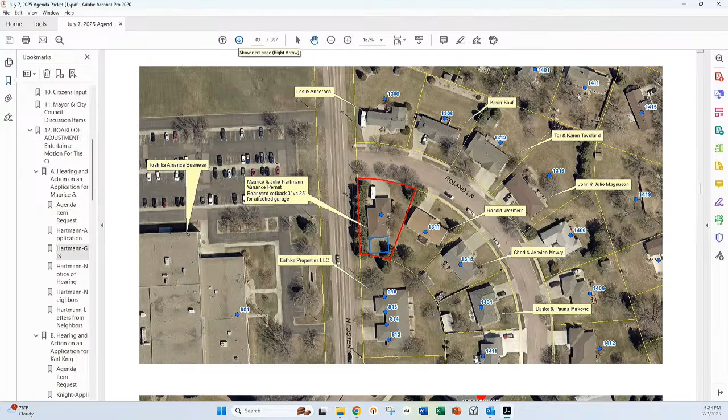Would anyone else in the audience like to discuss this?

All those in favor of the motion say aye. Aye. Opposed, same sign.

Hearing and action on the application for Karl Knight variance permit. Karl Knight has applied for a variance permit for a rear yard setback of 11 feet versus 25 feet for an attached covered patio. This is located at 318 Christine Street, legally described as shown on the agenda.

Mr. Jennings: Mr. Mayor and Council, Planning Commission recommended approval of this. There were 2 letters returned in favor. Notices were sent out to neighbors, signs posted, published in the paper.

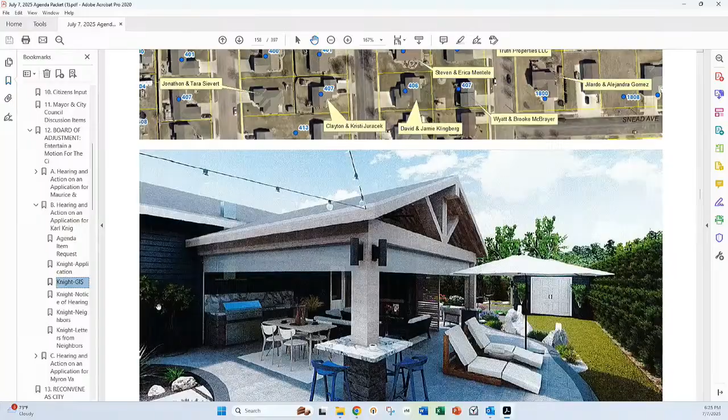He would like to put an attached covered patio over his existing patio. This is just a rendering that he had an architect or designer come up with for that location.

The discussion during Planning Commission was that things like this have been approved in the past, but then in the future people come back in and close around the whole thing. His purpose right now is not to enclose it, but we've seen it happen before for other locations. It's just something we have to monitor in the future.

I can answer any questions you have for me. Move to approve. Motion by Mr. McCardle, second by Mr. Goldhammer. Further discussion?

Would anyone in the audience like to discuss this? All those in favor of the motion say aye. Aye. Opposed, same sign.

Motion carries. Hearing and action on the application for Myron Van Buskirk second amended and restated revocable trust conditional use permit. Van Buskirk Homes LLC, on behalf of Myron Van Buskirk second amended and restated revocable trust, has applied for a conditional use permit for a multifamily dwelling unit between 5 and 12 units located at the 900 block of West Norway Avenue, legally described as shown on the agenda.

Mr. Jenigas: Mr. Mayor and Council, Planning Commission recommended approval of this. Notices were sent out to the neighbors, signs posted, published in the paper. There was one letter in favor of this and 5 letters opposed.

The applicant would like to put 2 fourplexes on this property running east and west. At our last Board of Adjustment hearing, Van Buskirk talked about doing these fourplexes that are up on Lakeview Lane. It would be the same layout as those.

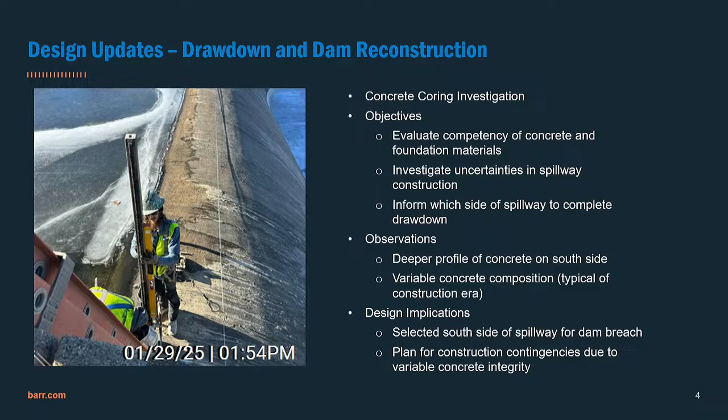For that reason, we're building in construction contingencies. Is it not as thick as we thought it was going to be? Is the integrity perhaps a little bit lower? So, patches, ways to stabilize the foundation, things like that, make sure that we're not creating a structural issue during the drawdown, and then also during the multi-year period when water is passing through it while the lake is drained.

So this is step one of phase one of the project, where we're going to use siphons, pumps, cofferdam, whatever means the contractor chooses to remove a lot of the water from the lake. We're going to do that in a controlled manner, so we'll limit that drawdown rate, and that's for a couple of reasons.

One is structural and geotechnical integrity and stability of the shoreline. If you have a big body of water and you remove all the water suddenly, all the water is still in the soils, right? And so you have this differential pressure. You have to bring it down slowly so that the soil dries out at the same time.

The second reason is to not have a big flush of water go down the Firesteel Creek that's different than what it typically observes. That's important for sedimentation, for the Topeka shiner, a protected species known to be in the Firesteel Creek. So we'll do that over an extended period of time, and we'll install some downstream sedimentation control so we're not sending a bunch of dirty water down the Firesteel Creek.

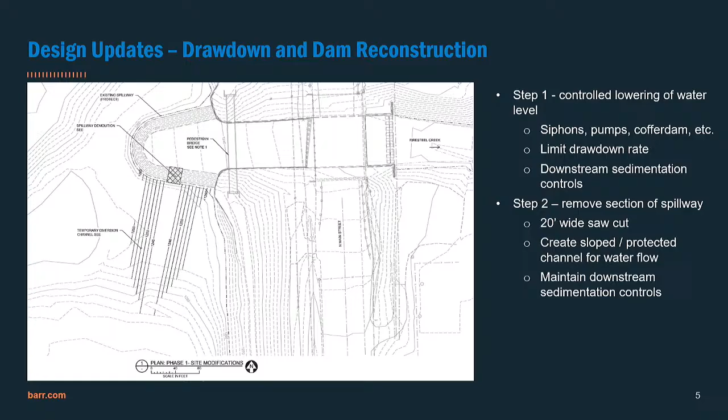So this has some kind of a closure piece that will be able to raise and lower, is that correct? To allow more water or less water.

So I guess my struggle is, as long as we're doing it, why not just in case go lower? The reason being, if we were ever to draw the lake down again, even if you could get it down with the pipe, to maintain it you'd still have to cut a hole in the spillway again.

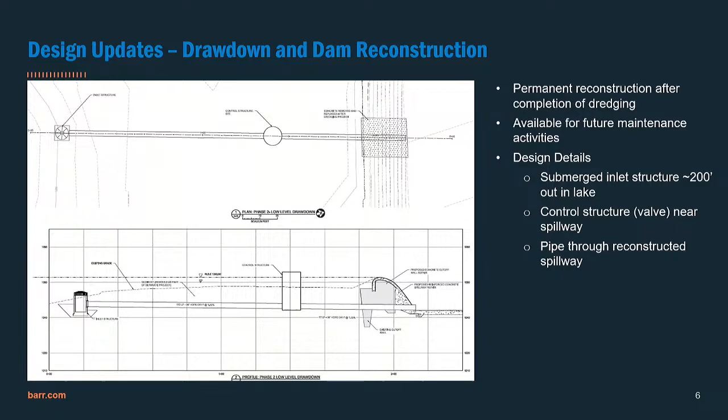Yep, thank you. I guess this was the image I was referring to.

Again, it won't look exactly like this. Evaporation will happen, and the contractor will route water in different areas. They'll probably try to keep it out of that northern part where our dredging area is focused. But the takeaway is that there will be a fairly large area where there's still a constant pool of water, with the deepest part in that larger southern third of the lake.

We took the water usage rates for the golf course that we had and made assumptions on water usage for the other areas, then looked at historical flow rates coming down Firesteel Creek—looking at a very dry year, a wet year, a normal year, how much water is being used, how much is being maintained.

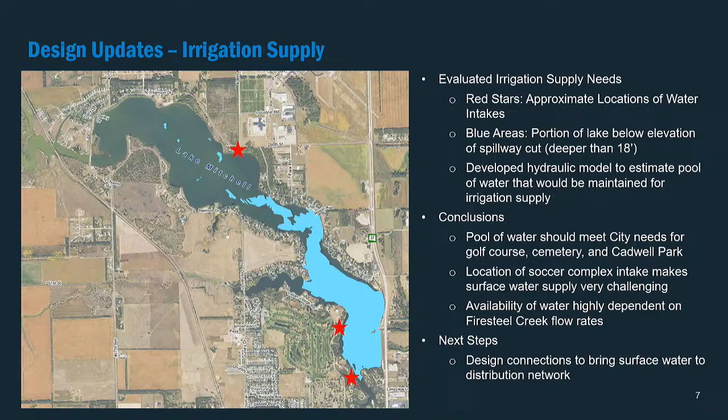On the permitting side, as I mentioned earlier, we've had a half dozen or so interactions with the U.S. Army Corps of Engineers. We've prioritized that because it's probably the most lengthy potential permit process and pulls in a bunch of other evaluation needs. We had a win a few months ago, where we determined the project will qualify for a nationwide permit versus an individual permit. I won't bore you with the details, but it means the permitting efforts are streamlined—a little easier and faster. But any federal permit, nationwide or not, triggers a handful of other evaluations.

These include special aquatic sites—I'll define that in a minute—threatened and endangered species, and cultural resources. I've got a couple of slides here on each of those and what we've been doing.

Special aquatic sites are things like wetlands, vegetated shallow areas, and mud flats. We did a desktop delineation of where they are in Lake Mitchell. Key findings: there's a handful of vegetated shallows around the fringes and in the upper reach of the lake, a couple of areas probably classified as wetland—the largest right downstream of the bridge at the mouth of the lake, and a small area around the island—and a couple of little areas classified as mud flats way down the southern tip of the lake, which won't really be affected by our project. We've reported these findings to the U.S. Army Corps of Engineers, and I'll talk in a couple of slides about the design implications.

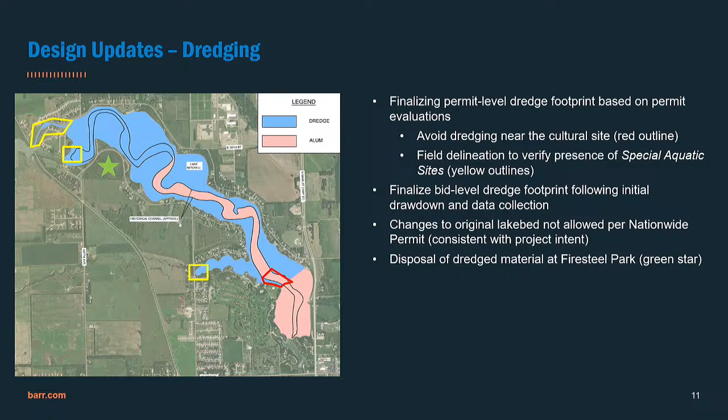We're just cleaning it up, right? We're not changing what was intended to be there. And then we'll dispose of the dredge material at Firesteel Park. I don't have an image showing that, but we're working on that design update as well.

So the targeted schedule, we're going to get that Army Corps nationwide permit application, or pre-construction notification, submitted in the very near future. Like I said, we got good news on that in the past couple of months, so now we're really putting the pedal down on that one.

Other permits will come, some prior to issuing for bid, or some prior to construction. There's some permits you don't get until you have a contractor on board, things like that.

From the construction standpoint, we're thinking about this in two phases and two contracts. The first phase being that initial lake drawdown, and the second phase being everything else - the dredging and disposal, reconstruction of the dam, and construction of that permanent drawdown structure.

So we're looking, like I said, at getting that permit application submitted ASAP. We've been keeping the Army Corps informed as we go, and I got a note just last week that looks like we're on track. We're getting all the pieces done that we need for those other aspects, so I'm hopeful we can get that permit review pretty quickly, and then go out to bid shortly thereafter, and start construction

yet this fall - get it drained before the lake freezes up. Phase 2, we're working through the design on that. We'll get some additional data collected after the lake is initially drained, get that bid package put together to go out next spring, and be ready to start that construction project next spring or summer, and that'll go, like we've talked about, for probably two years.

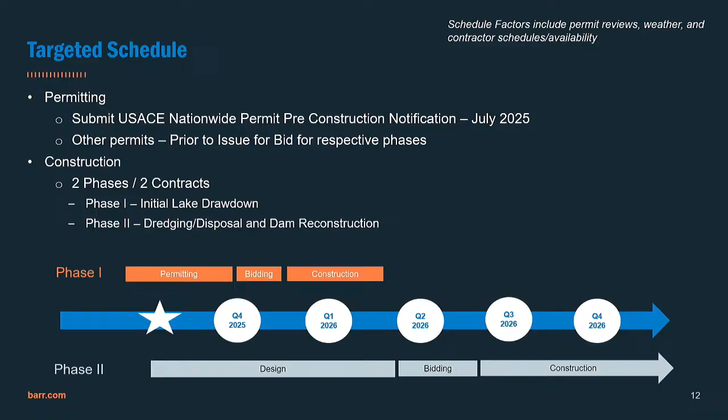Explain why - I mean, I look at dam reconstruction as a specialty business. Why would you tie it with the dredging and disposal, where I assume the dredging guy is going to hire the dam guy and put 15% on it? Why would you not do a phase 2A and B or something instead?

You could do that. I think as Joe and I have discussed this, there's some benefit in having fewer contracts that you're holding, as far as less finger pointing sometimes - it's like, well, you weren't ready for me, and now you weren't ready, I wasn't, those types of things.

But I think that is open for discussion - you bring up good points, I'm not trying to dismiss them by any means. I think we could have a conversation around that. The big question there is, what's a bigger benefit - controlling the schedule or keeping the contracts separate? So that's how Eric and I will weigh through those pros and cons and take a path moving forward.

I got a quick question - so what you're saying is the permitting, not all of it is approved yet, correct? Correct. So I know government doesn't move real fast. What happens if something happens there? I mean, it takes a while, doesn't it?

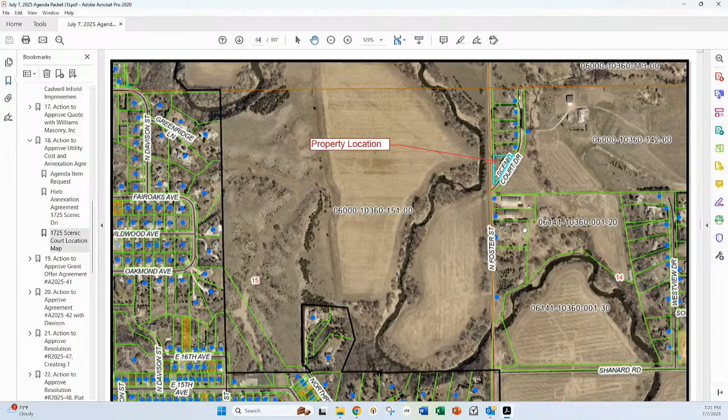Action to approve grant offer agreement A 2025-41 for the Infrastructure Investment and Jobs Act IIJA Airport Infrastructure Grant AIG for the construction of a revenue-producing hangar, grant offer AIP 33.

Mr. Schroeder: Yep, Mr. Mayor, Council. The airport is requesting City Council approve the grant offer for the Infrastructure Investment and Jobs Act Airport Infrastructure Grant for the construction of a revenue-producing hangar. A request was authorized by Council on April 7th, which requested $1,070,650 with 90% federal share and 10% city share. The city has been awarded the requested amount, and this is for the bid that was approved or awarded to Pro Contracting. The proposed hangar will consist of 4 separate areas to store aircraft. Staff recommends council approval and the grant authorization for the mayor to sign and for the grant offer to be executed. I can answer any questions you may have.

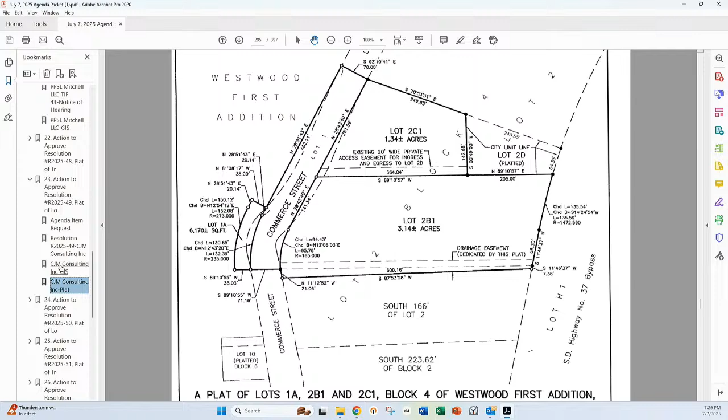1A is now, it's 6,000 square foot. You can see that dashed line. That was part of lot 1 before. So that would have been a non-conforming size for a lot. That does meet the zoning requirements for 6,000 square feet for lot 1A. In the future, when they do their master plan for the rest of the area, that lot will probably be vacated into a bigger lot at that time. But with them doing this, Commerce Street will be a right of way. It's getting straightened out for better safety. And there is an easement that still gets to lot 2D through 2C1.

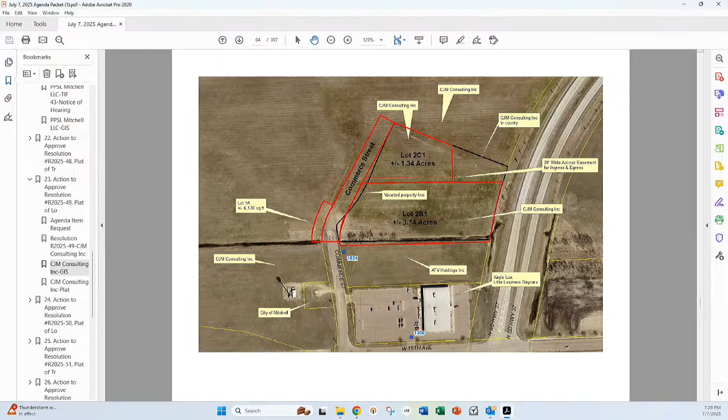I can answer any questions you have. Motion by Mr. Girdle, second by Mr. Goldhammer. Further discussion? Would anyone in the audience like to discuss this?

All those in favor of the motion say aye. Aye. Opposed, same sign. Motion carries.

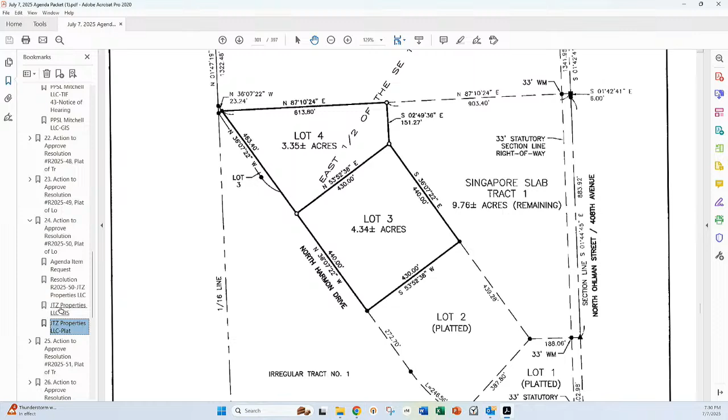Action to approve resolution R 2025-50. Plat as shown on the agenda. Mr. Jenigas: Mr. Mayor and Council, Planning Commission, motion to approve 5 ayes, 1 abstain, and 1 absent. This is currently outside city limits, but within the 3 mile, so it is our zoning jurisdiction. It is currently urban development zone. Later on in this meeting, you have the rezone for that whole 25 acres. This still would meet the qualifications for the zoning of that PUD as well. County will hear this tomorrow, but like I said, it's our zoning jurisdiction. I can answer any questions that you have.

Move to approve, second. Motion by Mr. Goldhammer, second by Mrs. Sharks. Further discussion? Would anyone in the audience like to discuss this?

All those in favor of the motion say aye. Aye. Opposed, same sign. Motion carries.

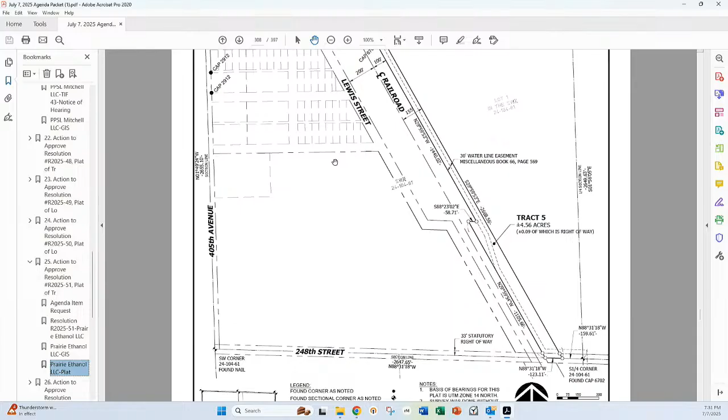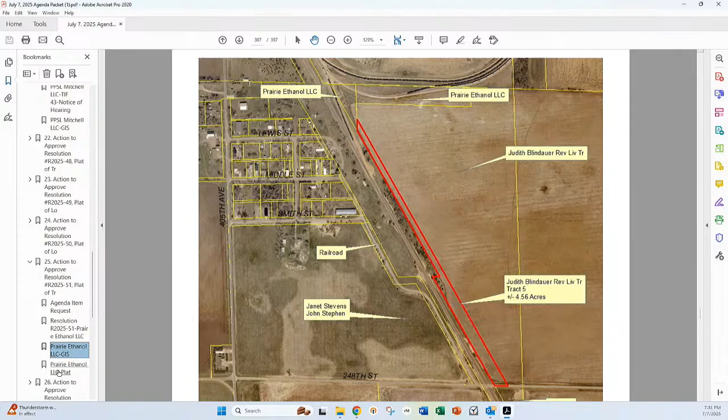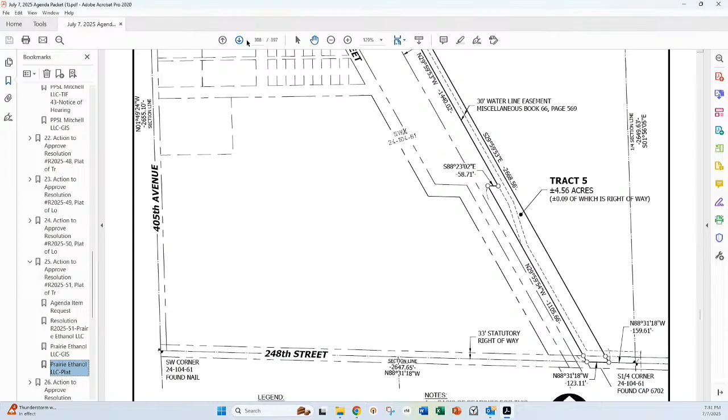Action to approve resolution R 2025-51. Plat as shown on the agenda. Mr. Jenigas: Mr. Mayor and Council, Planning Commission, motion to approve the plat with the amended language. At Planning Commission in the packet, we didn't have the final plat. It didn't have any deputy or vice chair language with any of the signature blocks, so we approved that with those amendments. What you have in front of you in your packet is actually the final plat because it has all the correct verbiage in there. Poet is looking to increase their rail size, so the next 4 plats are all for doing that. We do have a water line easement, which is actually their water line, so they're working with Joe if they need to do any work in that. We've got information that they can get for that. I can answer any questions you have. Oh excuse me, County will hear this tomorrow at their meeting as well.

Motion approved. Motion by Mr. Shavers, second by Mr. Goldhammer. Further discussion? Would anyone in the audience like to discuss this? All those in favor of the motion say aye. Aye. Opposed, same sign. Motion carries.

Action to approve resolution R 2025-52. Plat as shown on the agenda. Mr. Jenigas: Ditto, nice, I like it. Second. Motion by Mr. Kamarko, second by Mr. Goldhammer. Further discussion? Would anyone in the audience like to discuss this? All those in favor of the motion say aye. Aye. Opposed, same sign. Motion carries.

Action to approve resolution R 2025-53. Plat as shown on the agenda. Mr. Jenigas: Ditto, nice. Second. Motion by Mr. Barrington, second by Mrs. Charks. Further discussion? Would anyone in the audience like to discuss this? All those in favor of the motion say aye. Aye. Opposed, same sign. Motion carries.

Action to approve resolution R 2025-54. Plat as shown on the agenda. Mr. Jenigas: Ditto. Okay, move to approve. Mr. Goldhammer, second by Mr. Barrington. Further discussion? Anyone in the audience like to discuss this? All those in favor of the motion say aye. Aye. Opposed, same sign. Motion carries.

Action to approve resolution R 2025-55, surplus of the auction of 3 trailers and 1 building in the 1100 and 1200 blocks of East First Avenue. Mr. Johnson: This should look somewhat familiar. The city's done a couple of these surplus and auctions relating to that Parkview area that the city acquired earlier this year. This most recent round would include the 3 trailers and 1 building. The 1 building was previously surplused. At the auction, there was nobody in attendance, so the idea would be to put it back on auction this time since the other trailers are going on there, give it another shot.

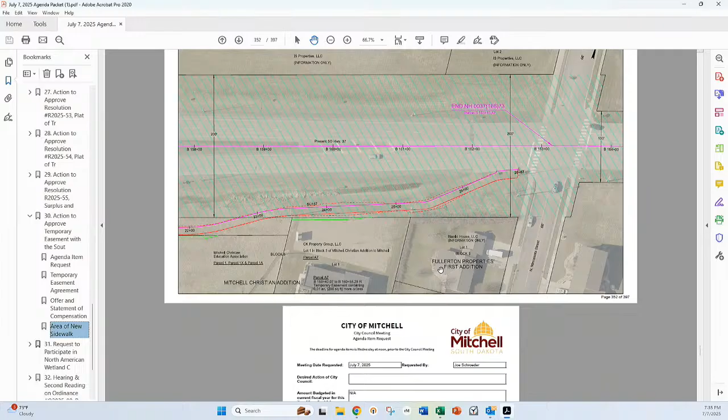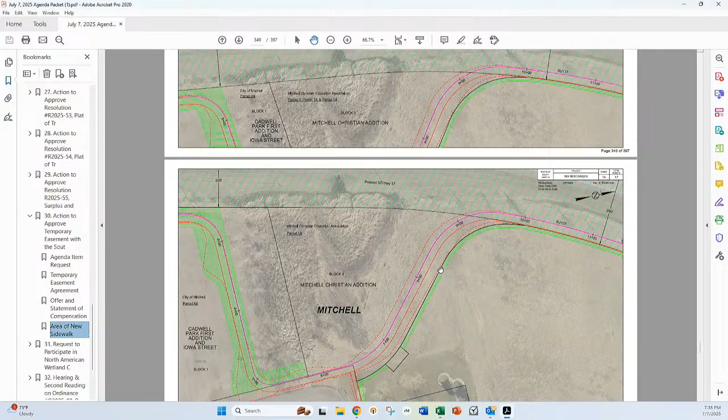State compensates landowners for temporary easements. However, it is typical for cities to waive those fees. The contractor hired for the project will be required to restore any disturbed ground. Staff recommends council approval of the temporary easement agreement, waive the associated payment, and grant authorization for the mayor to sign. I can answer any questions you may have.

Move to approve. Motion by Mr. Goldhammer. Second by Mr. Barrington. Further discussion? They're starting this work already, so it's going to be exciting.

Would anyone in the audience like to discuss this? Okay, all those in favor of the motion say aye. Opposed, same sign. Motion carries.

The $3 million, the 26 projects, that hasn't changed, but some other things have. Our project match for the NAWCA grant, that would include $570,000 spent towards the Ducks Unlimited Wetland project west of the lake, which created 37 acres of wetlands, and then also the $200,000 for the purchase of the Kiner property.

With that, I think I will let Steve go through the new NAWCA grant and let him answer any questions you may have. Go ahead, Steve. Sure, thank you. The NAWCA grant program is a federal wetlands grant, and I'm the guy that wrote the grant proposal for the Firesteel Creek NAWCA grant several years ago, and then the city subsequently hired me to administer that grant. We're wrapping that one up, working on the last project right now. That'll be done this year. So I'm writing another NAWCA grant proposal, the one Joe's talking about.

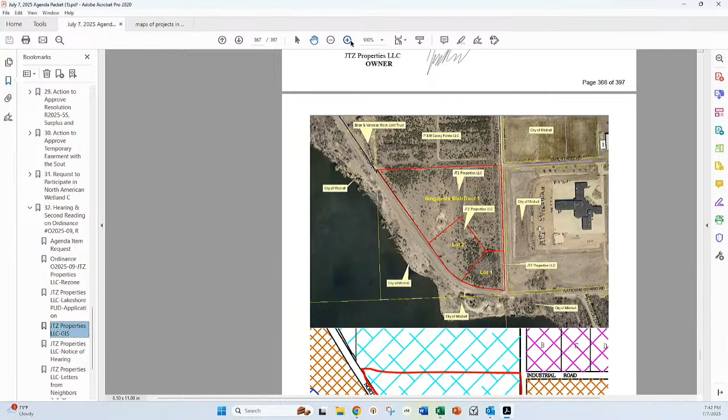Hearing and second reading on ordinance 2025-09, rezoning as shown on the agenda. Mr. Jenigas: Mr. Mayor and Council, as this is second reading, nothing has changed with the ordinance after the first reading. During the first reading, there were 4 letters opposed to this. Since then, in this packet, there are 20 new letters in favor, and I'm passing on another 7 that have been in favor as well. So the only new information I have from first reading is the 27 letters you've received. You've also gotten them by email, I believe, but I'm bringing them to the meeting as well. I can answer any questions you have.

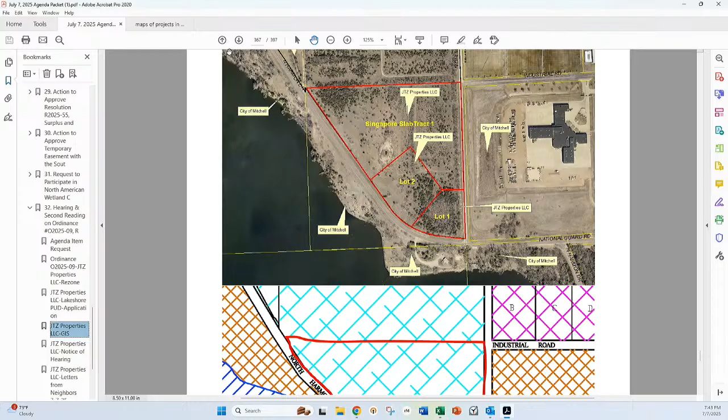Motion to place on second reading. Second. Okay, we've got a motion and a second. Further discussion? Would anyone in the audience like to discuss this?

All those in favor of the motion say aye. Aye. Opposed, same sign. Motion carries.

Motion to adopt ordinance 2025-09. Second. Motion by Mr. Sabers, second by Mr. Goldhammer.

Would anyone in the audience like to discuss this? Okay, roll call. Barrington, aye. Bathke, aye. Church, aye. Smith, aye. Sabers, aye. Goldhammer, aye. Dosher, McCardle. Motion carries.

All right, so we're going to skip back to number 21 now. Action to approve Resolution R 2025-47, creating tax increment district number 43 and approving the project plan. Mr. Johnson, all right.

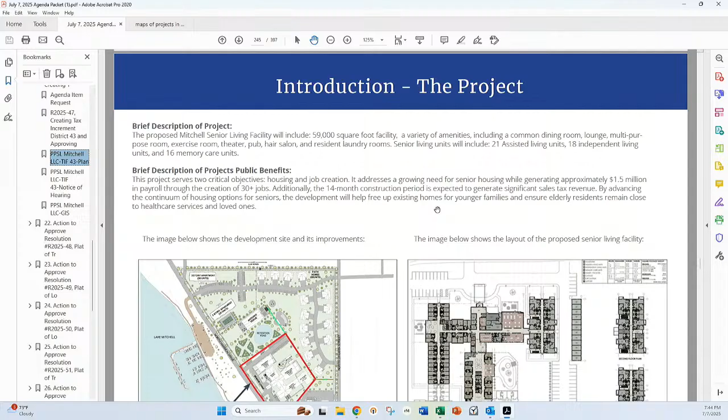So just a brief overview on this one. The project, I believe, is Peaceful Pines, the name of the development. It's being pursued by the landowner and several holding companies, one of those being a larger company that's done these types of developments in a number of other communities throughout the state. This specific development would be a senior living facility, including 21 assisted living units, 18 independent living units, and 16 memory care units.

The development is expected to generate approximately $1.5 million in payroll throughout the creation of 30 plus jobs.

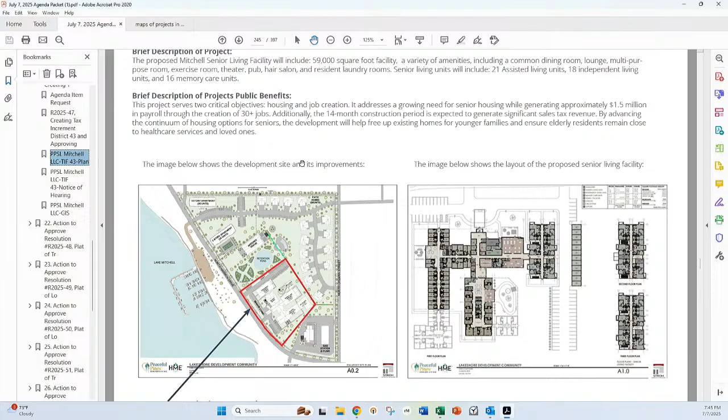Staff did review the project plan and the application materials. The TIF review committee did meet, went over those items, and worked with the developer to bring those up to the point that you see in front of you here today. Staff did believe that they'd meet all of the requirements of our local TIF handbook, the Mitchell TIF handbook, and the requirements of the state statutes on TIFs.

Moving down then, the project plan's in a little bit different order than we're used to on some of the other ones, so I'm looking in the wrong spots for the information I'm used to. On the property tax rate, there's a limitation on how much property tax you can have contributing or encumbered by TIFs. That limit is 10%. Our current limit is well under that as to the amount that we have under TIFs.

And if we want to get into the project cost, Stephanie, the total eligible project cost for the project adds up to $2,893,558. That includes the grant to the developer, and there also is administrative fees to the city of $375,000.

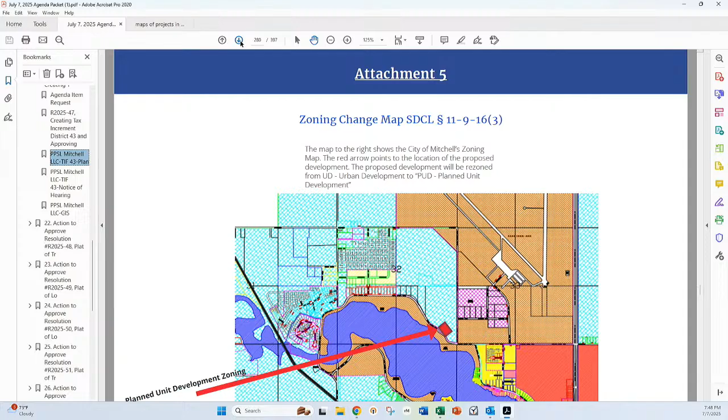We did also receive preliminary classification from the state that it would be classified as an economic development TIF. So I think with that, we can open it up for questions, or if anybody else on the staff side or ownership side has anything they'd like to add.

Move to approve. Second. Motion by Mrs. Church, second by Mr. Goldhammer. Further discussion? Would anyone in the audience like to discuss this? All those in favor of the motion say aye. Aye. Opposed, same sign. Motion carries.

Motion to enter into executive session according to SDCL 1-25-2 for employee negotiations.

Can I bring up one thing before you guys close? I don't know, will you come up to the podium? I'm guessing they're going to allow it, so keep it brief if you would, please.

Before I get too much credit, or my checking account is overdrawn, Mr. McCardle spoke a little bit wrong. I have raised $29,000 in private funding for the project. I am donating to the project, but my checkbook's not quite that deep. So, Mr. McCardle, thank you for that, but the applause was nice anyway. Well, thanks for raising the funds.